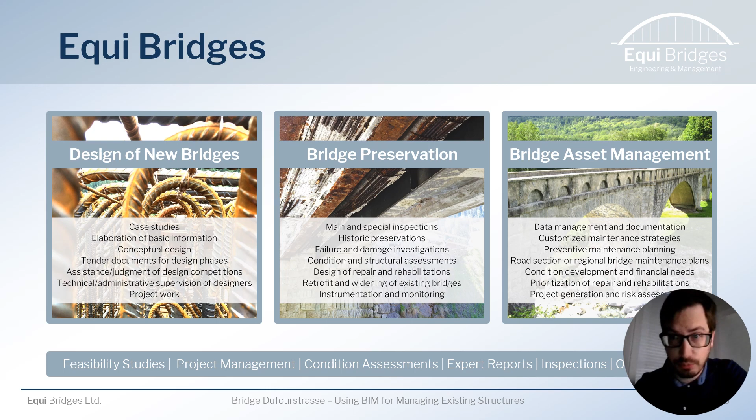So let's look at the project. The bridge Dufourstrasse is located close to the city of Zurich, just at the southern border. There is a bridge crossing a larger road and railways. In fact, there are two, or when you look closely, even three bridges in this area. The full infrastructure object is named the bridge Dufourstrasse, and it also covers a pedestrian underpass, retaining walls, stairs and ramps to access the bus stop on top of this bridge.

We focus in this BIM pilot project on the abutment area on the eastern side. The bridge itself is managed by the Building Department of the Canton of Zurich.

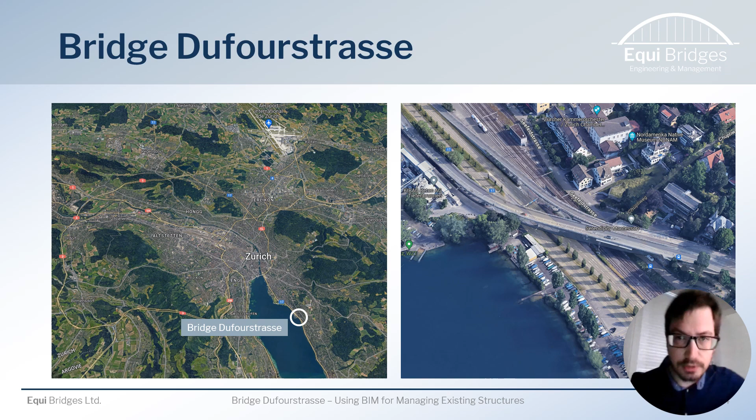The bridge was built in the 1970s and is today more than 50 years old. There was a refurbishment campaign in the year 2000, which mainly focused on the bridge structures, so the abutment section is mostly untouched. The abutment itself is geometrically complex, with many single elements, many joints, stairs and ramps.

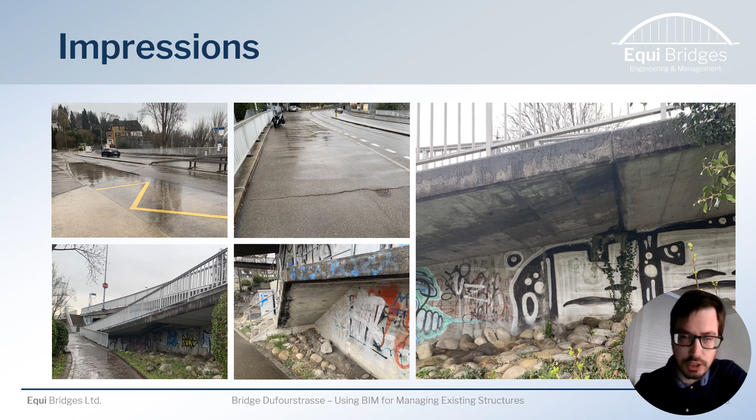You see here some images. When you look closely, you can clearly see the ongoing aging process. The bridges are connected to the abutment, so there is a fixed abutment here. You also see the two main bridges and the smaller third bridge for pedestrians. There are local damages, typically water ingress at joints, and also some local spalling or cracking.

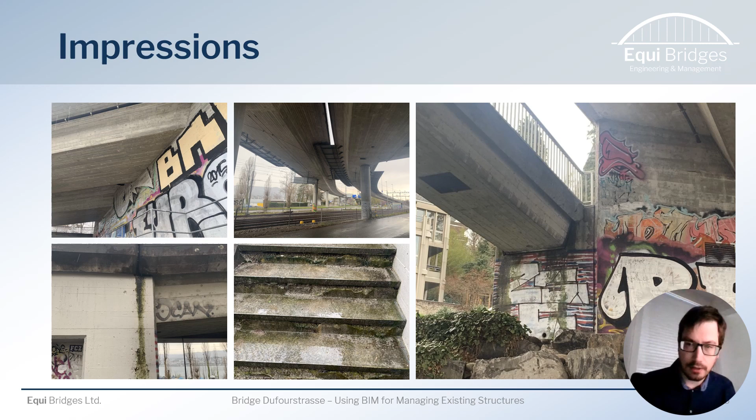The process of bridge preservation is well known, and I don't want to focus on explaining these steps in this presentation. The project itself has the following objective: how can this process of preservation be done using BIM?

How can the information from maintenance on damages, condition assessment and structural analysis be incorporated into BIM? How can a smooth handover of labor be ensured? What are available tools and what attributes are necessary for a successful implementation? The BIM pilot project Dufourstrasse is likely one of Switzerland's first projects to specifically address these questions.

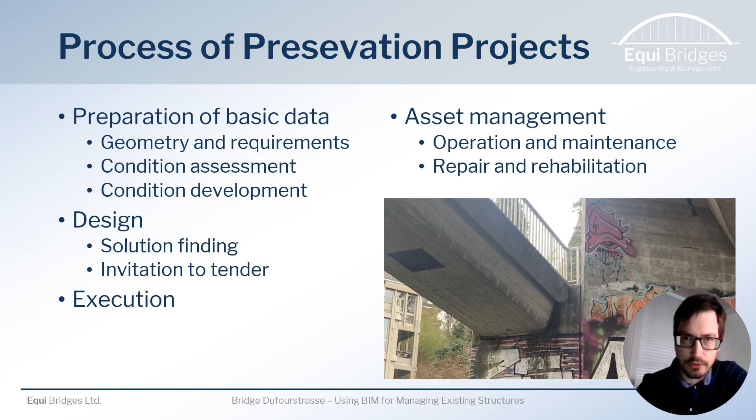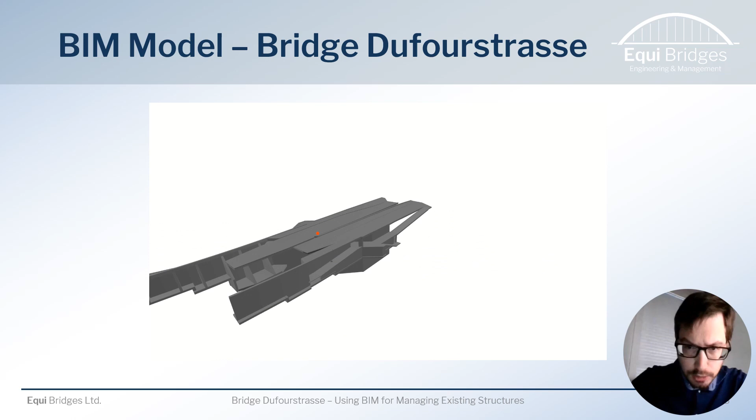So let's take a look at the outcome of these questions directly in the BIM model of Dufourstrasse. The project focuses on this rather complex abutment area. So you see now the 3D model. You can clearly see the various different elements, and you will immediately recognize the first benefit of BIM, namely 3D planning.

So without detailed knowledge of BIM, you quickly gain a good overview of the structure. This is an important advantage because infrastructure decision makers oversee many different structures and they only spend a limited time on each. The full model was created based on construction drawings from the 1970s, namely formwork and reinforcement plans.

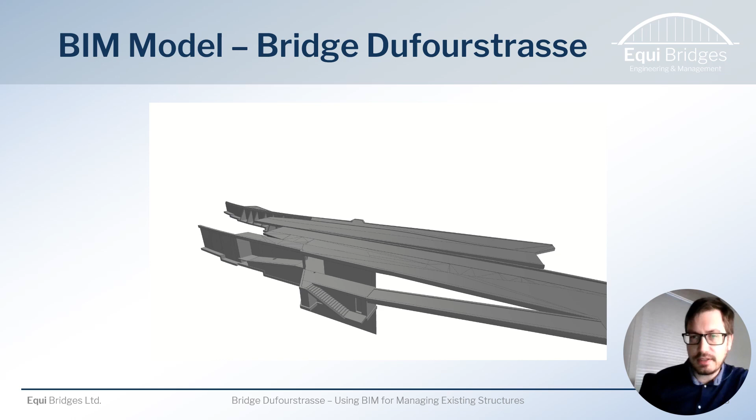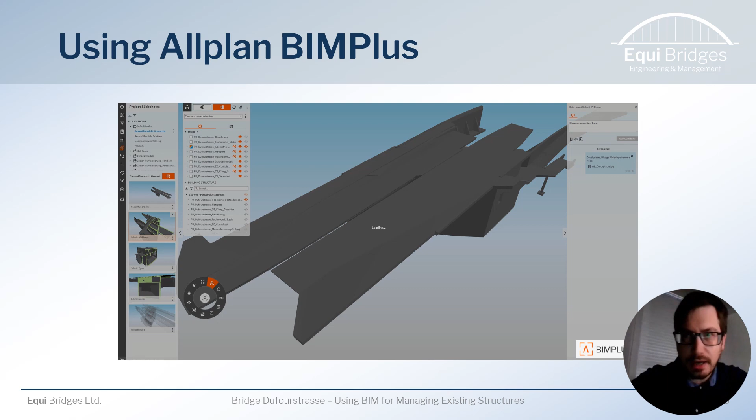Navigating through the 2D plans was not always easy because often reference axes were missing or lost. So using Allplan BIM Plus helps very well navigating the model. We prepared slides to ensure that everyone sees the same thing, and that also less experienced individuals can navigate the model easily. You can easily move sections to get a better understanding of the structure.

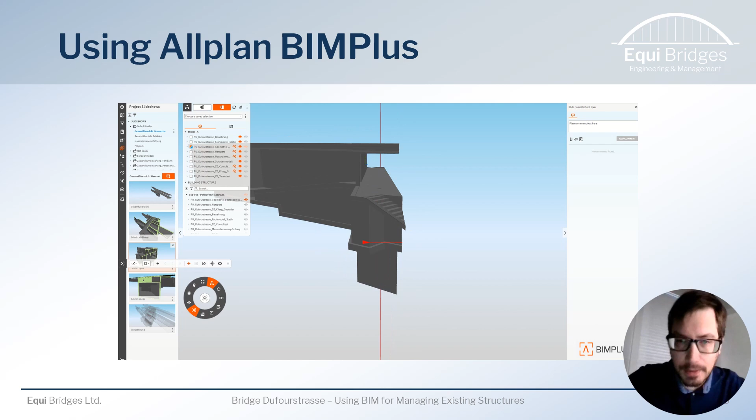You have seen here this rainwater tank below the abutment. This is the bridge abutment. You see here one bridge coming in. Also here, now you see the full section with characteristic T-beams of that rainwater tank. So the abutment of the bridge is fixed on top of another existing structure.

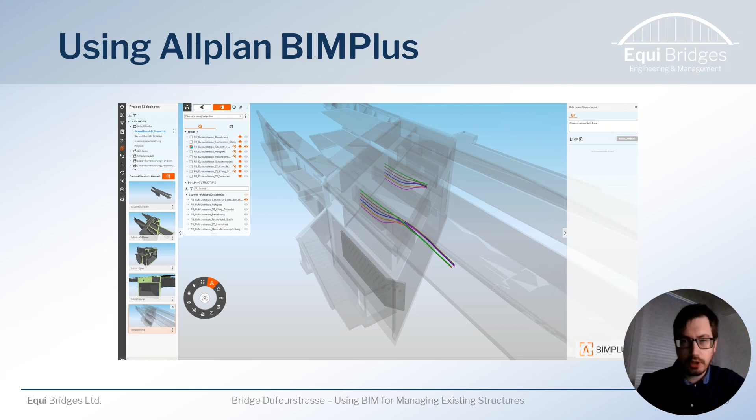So the representation in Allplan BIM Plus is really good, a good tool, and it helps to navigate the model. All those elements are attributed. Also with transparency, you can easily highlight some interesting characteristics like those tendons. And of course, if you attribute them, you get all the necessary information.

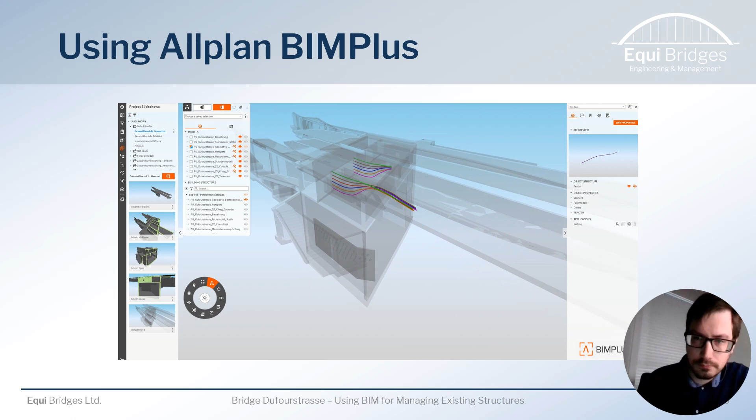The attributes are defined by client specification, and the Building Department of Canton of Zurich has a leading role in Switzerland there. They understand very well that uniform attributes across objects and project stages are critical for a successful BIM implementation. Only in this way can BIM contribute to smart asset management.

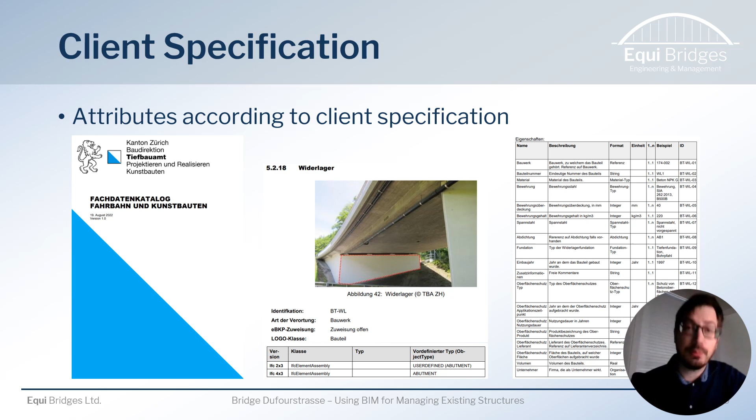One goal of this project was also to better understand which attributes are relevant for asset management of existing structures. They do not necessarily need to be the same as for new construction, as the focus is different. Today, asset management happens with databases, and the goal is to integrate or sync this BIM model into these existing platforms.

Now, managing infrastructure is more complex than it can be just done with attributes. Geometry and basic attributes are only one part of our model. We also have further information - inspection results, damage reports, results from condition assessment, structural analysis, etc. - which we should integrate into our BIM model. We represented those in individual discipline models, which we call submodels.

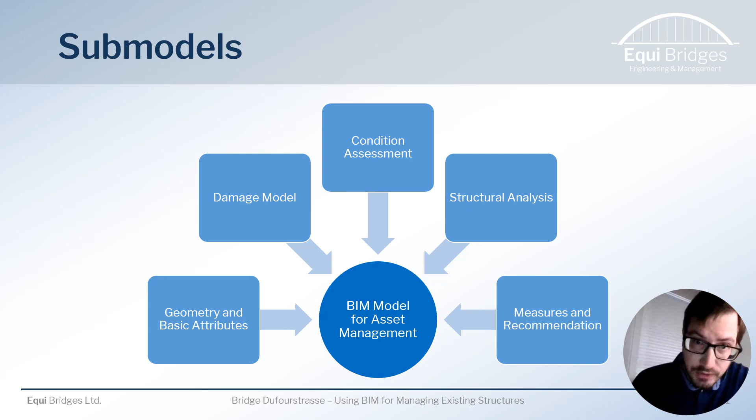The goal is to get a smooth knowledge transfer over phases, so that the next engineering office doesn't start from zero without any loss of information.

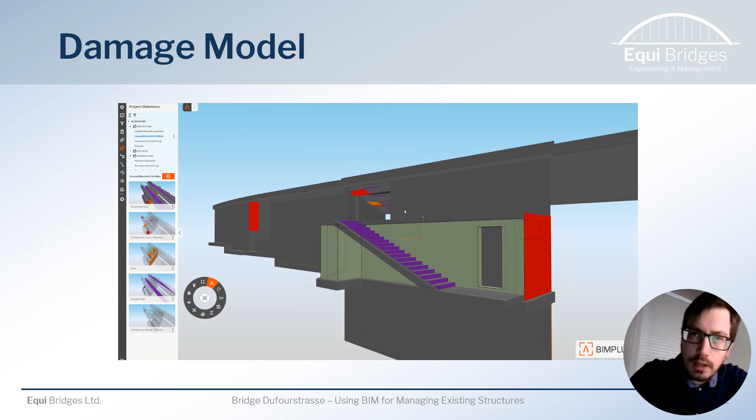In our damage model, different colors represent different damage types. For example, damage of pathways is purple. Structural damage of concrete, say from water ingress, is red. Just cracking is orange.

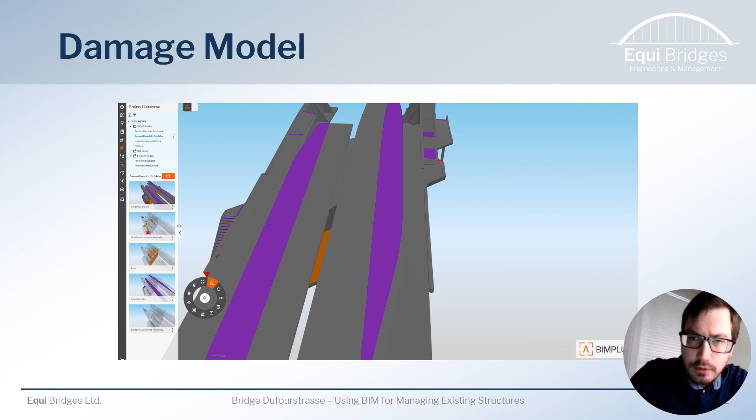We also report equipment damage, like for lighting or damaged doors, in purple. Using filters in Allplan BIM Plus, you can display only the relevant damages, and also with transparency, you get a good overview.

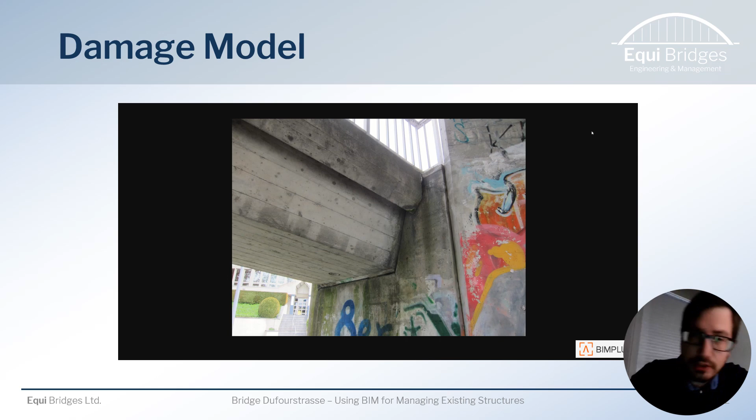Also with those pre-prepared slides, you can easily navigate the model. The damages are attributed, and you can get attachments like photos to each damage. Each damage has a unique number, so the photos are referred also

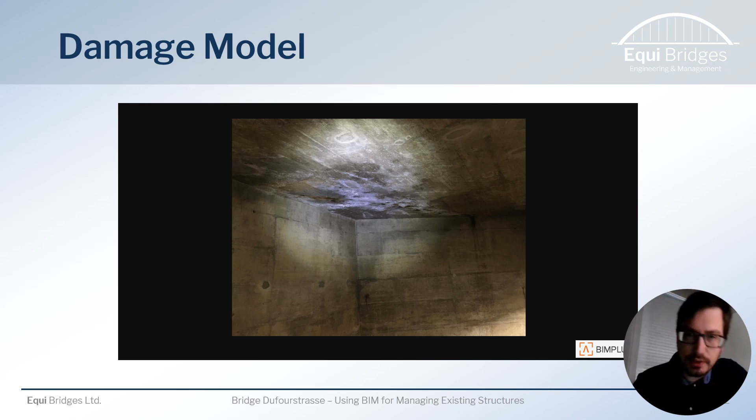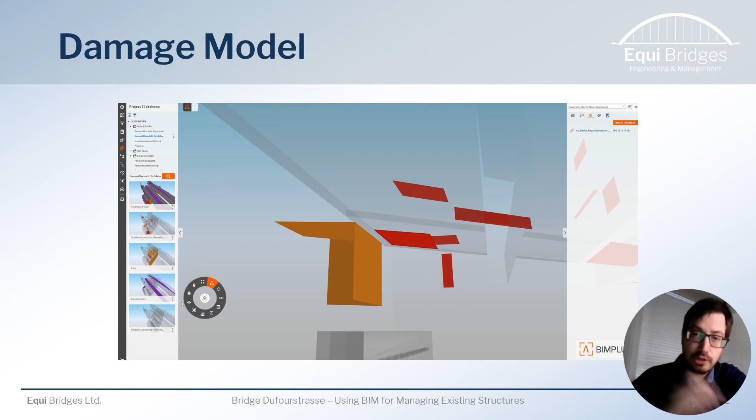to each damage. So you see here typical damage of structure, and with the 3D you get a good understanding of where those damages are. Are they top down or bottom up? And also you see how those damages are connected with complex geometry.

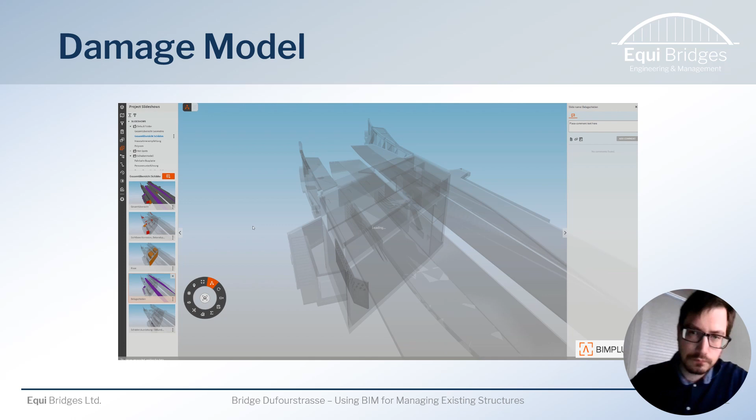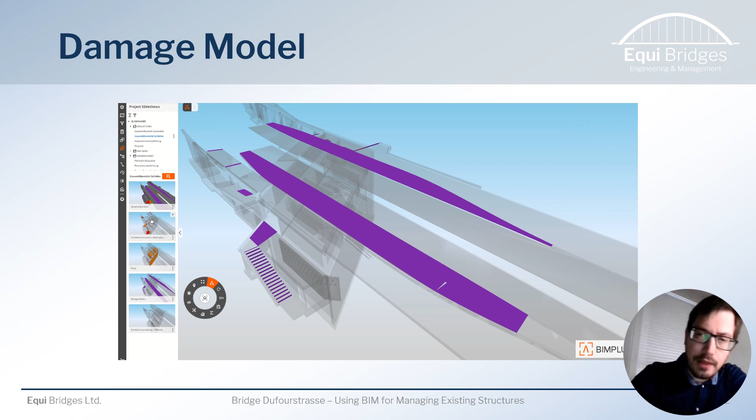We made this damage model quite schematic because it's a great tool in helping to get an understanding of where the hotspots of damage of the aging process happen. It's not a representation of the reality.

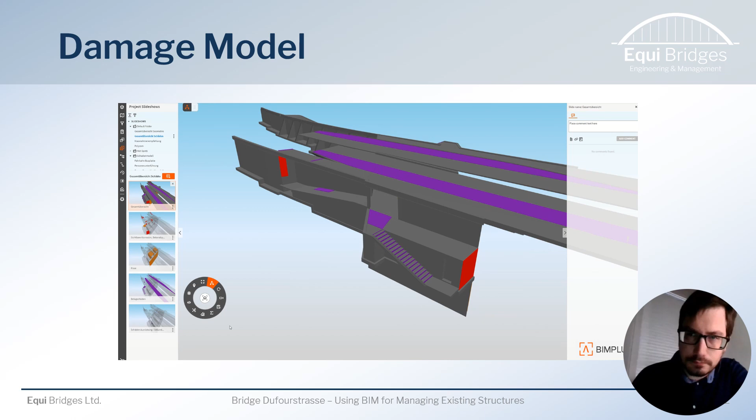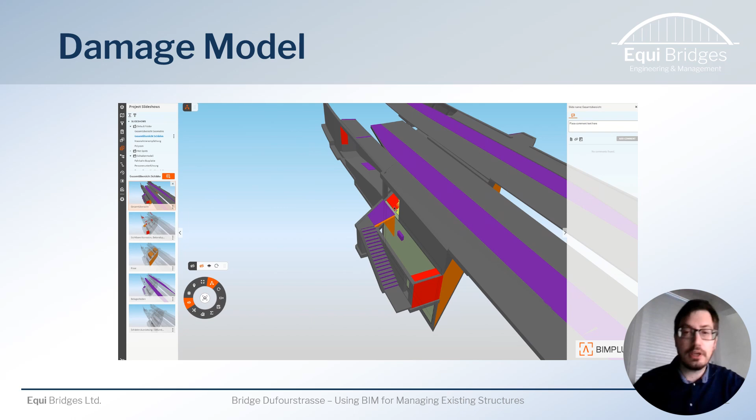You can also overlay information, typically also from condition assessment, and so you get a good and easy understanding of what has been done and where.

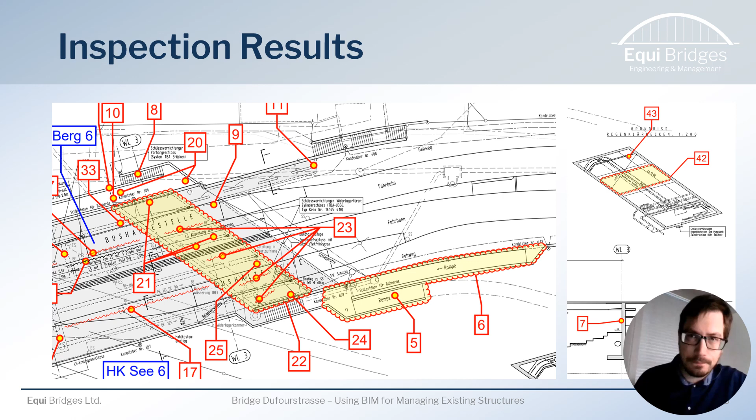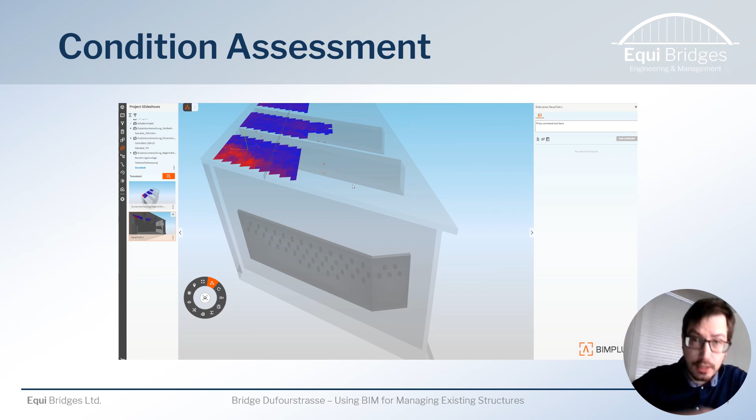Also regarding condition assessment, various material tests were conducted in this project. In this case, a potential field measurement of the ceiling has been executed, and you can see the result or the interpretation directly in the BIM.

Also here, you get the results directly attributed, and also when clicking on samples from material testing, you get the relevant attributes directly in the model.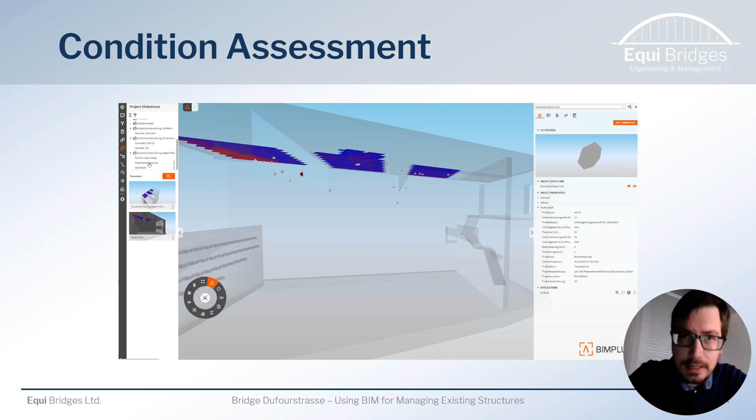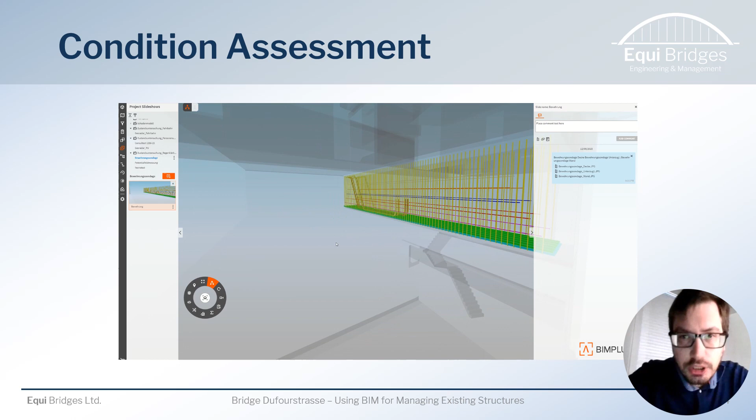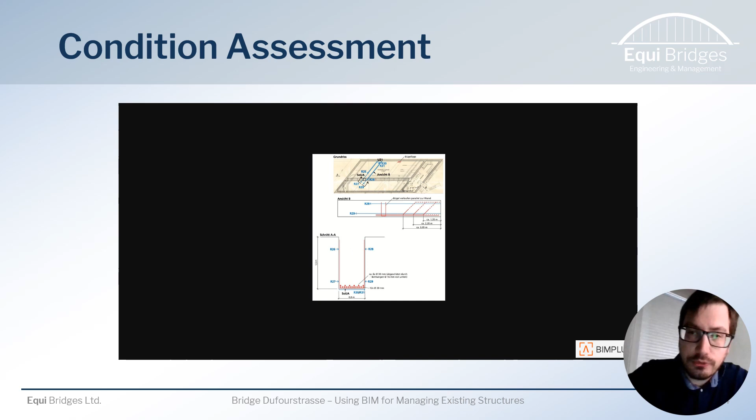Due to the lack of reinforcement plans, reinforcement was determined using radar and then shown in this model. So the next engineer will find this data directly in the model, so he understands where those results are coming from. We put attachments from the report there so that you don't have to look up the former report. Of course, the reference is there.

A strength of BIM is its machine-readable data handling. This allows us to filter functions to display relevant results.

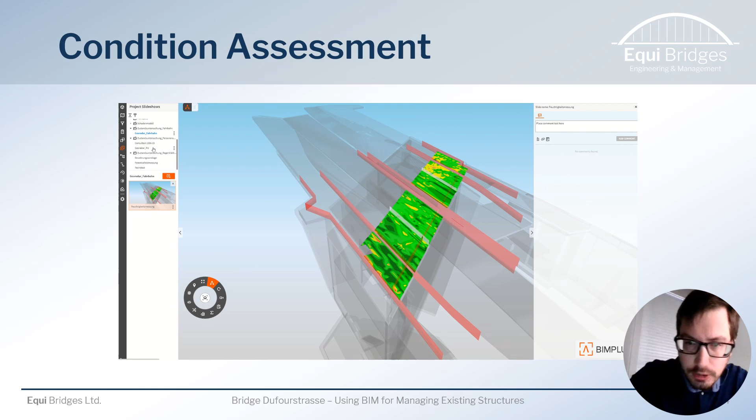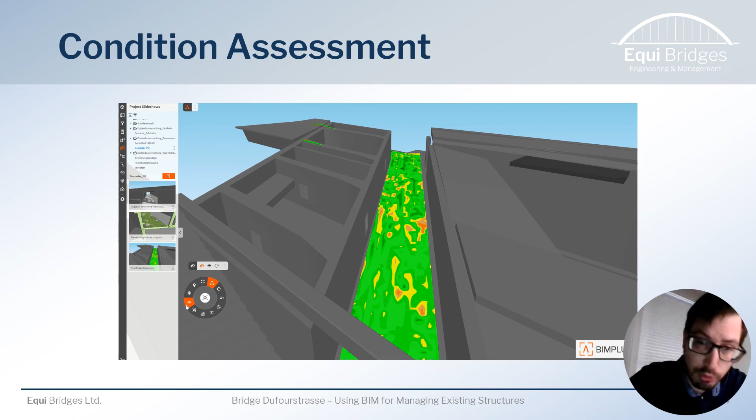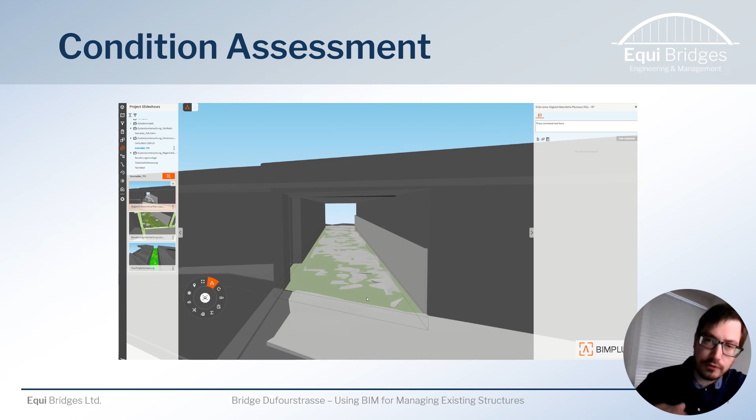So here you can also see GeoRadar, GPR measurements we executed on both floors, one on top at the bus stop, one beneath in the pedestrian underpass, to identify possible wet spots and also to check the difference between the existing surface and the level according to the plan.

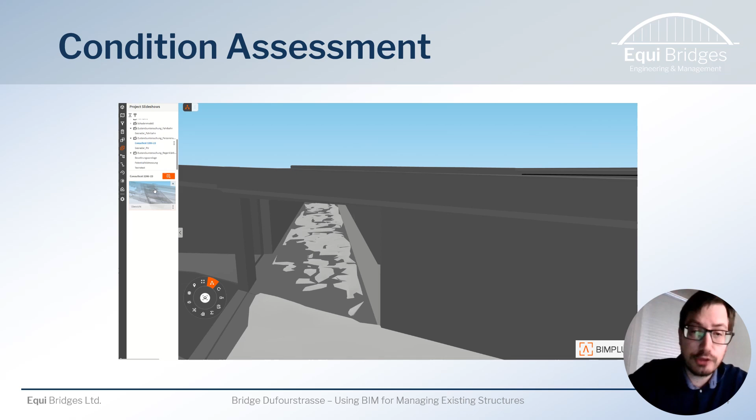So we could also measure the thickness of those slabs. Finally, also with transparency, you get a good understanding of what has been executed where.

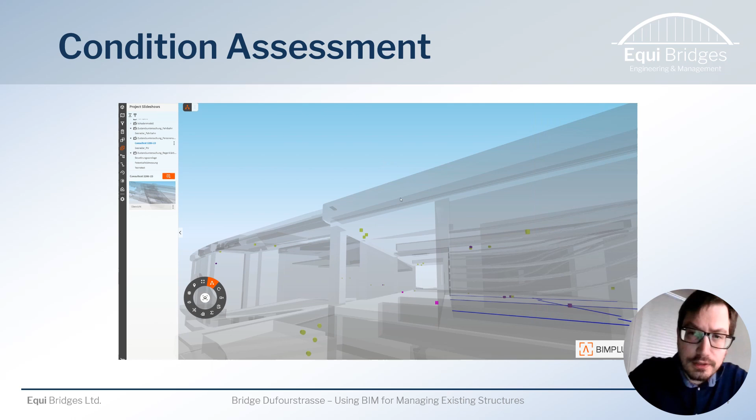Also here you can use different colors for different sample testings, and of course those attributes should be common, should be the same for all those projects the Canton of Zurich is handling.

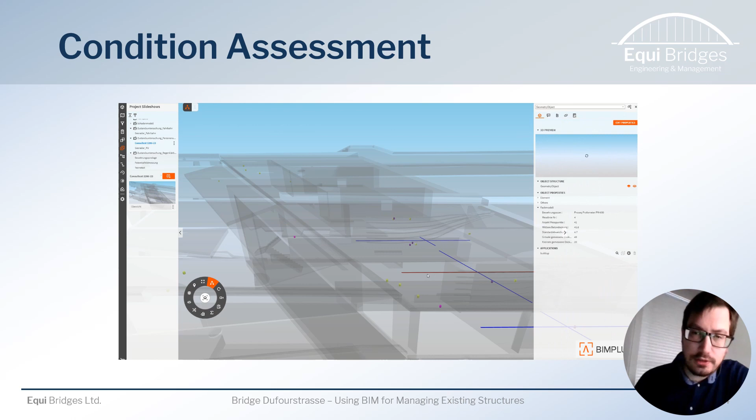We believe that results from the structural assessment should also be documented in BIM. If the structural assessment is only stored on paper, much of its utility is lost, because the most important results from the structural assessment, like utilization rates, associated load patterns, the structural model boundary conditions, etc., can be represented as attributes or elements directly in BIM.

So you get a good understanding about the structural model. In this case, you can see that the sidewall of the pedestrian underpass contributes essentially to the load transfer of the bridge abutment.

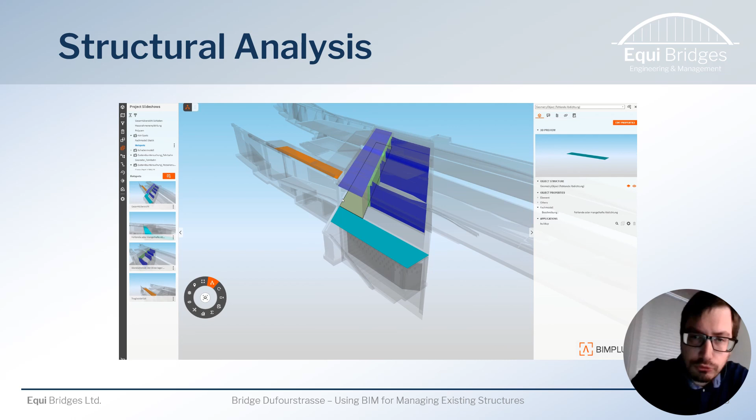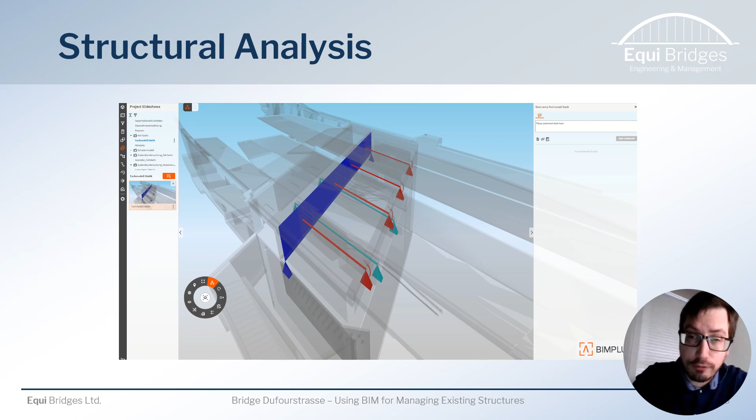And also we can highlight hotspots like where the pre-stressed cables are going, and other insights like whether we have water tightening or waterproofing, so we can guide the next inspection and prepare the inspection in the office with our 3D model.

Finally, we also present our recommendation in a submodel. All those models will be transmitted to the next engineer, who will then design the refurbishment project based on all this information. We think this is an advantage of BIM over the current state, as this new project designer has

not to study and think deeply into all those reports and analyze them, so he can start with detailing the solution at the right spot right away.

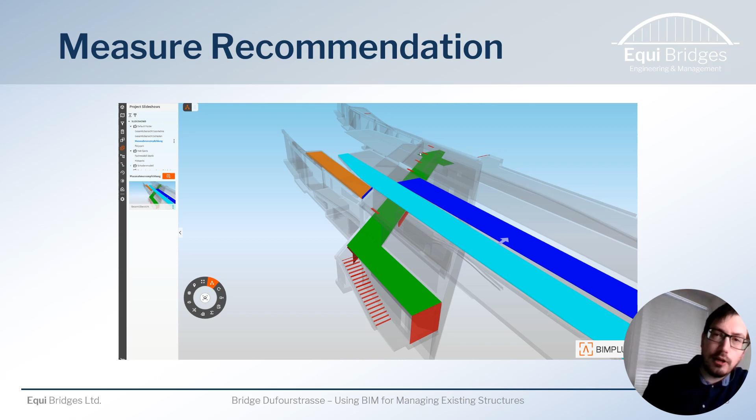Some final thoughts. The BIM pilot project Dufourstrasse has shown the possibilities of using BIM for managing rather complex existing infrastructure. Interdisciplinarity is a strength of BIM. The goal of using BIM is to reduce or eliminate information loss also during the years of a building's life.

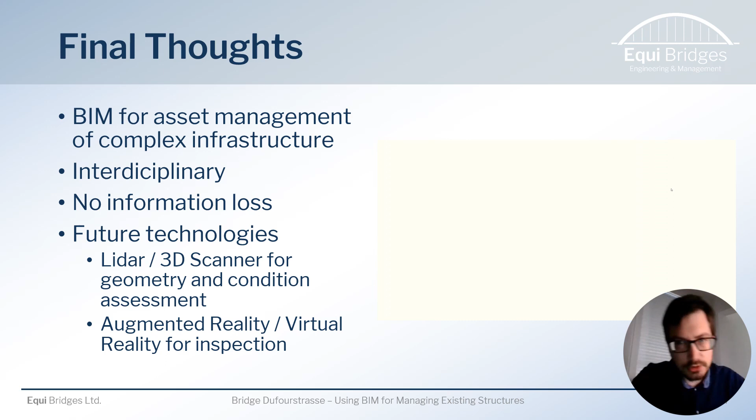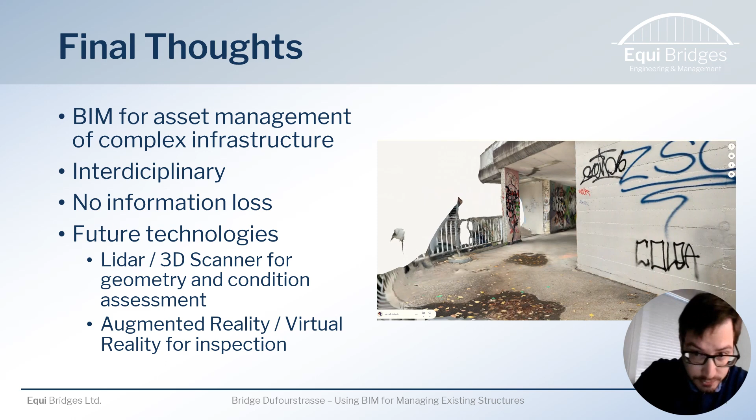Future technologies can also help speed up the process, like LiDAR or augmented reality can be integrated into BIM. For example, using LiDAR, you can get rid of photos and managing photos, putting photos together. It's a very interactive way to understand the current or past condition of a structure, and of course, like photography, engineering judgment and interpretation of the results is still necessary.

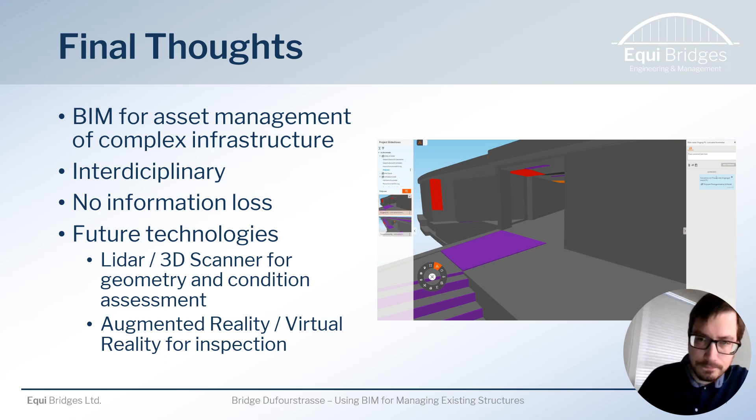So with that, I finish this presentation. I think we should not only focus on BIM for new construction, but especially for managing existing infrastructure. BIM should provide benefits to operators, and the infrastructure owner should benefit from BIM because it allows for more efficient work.